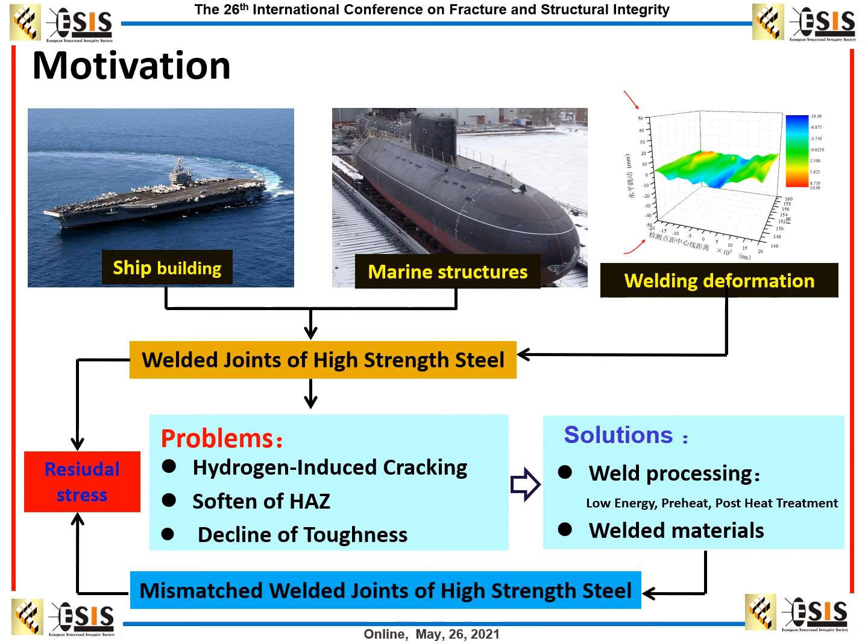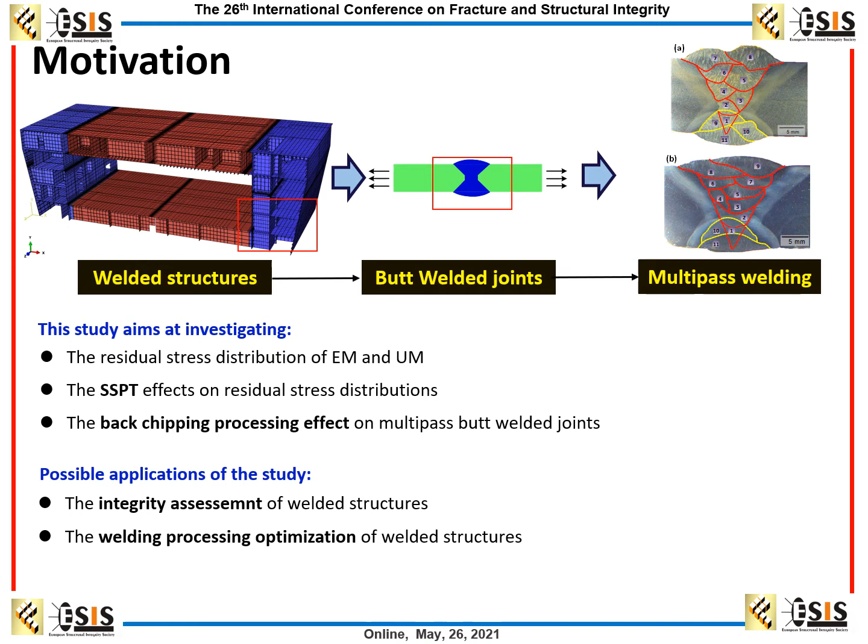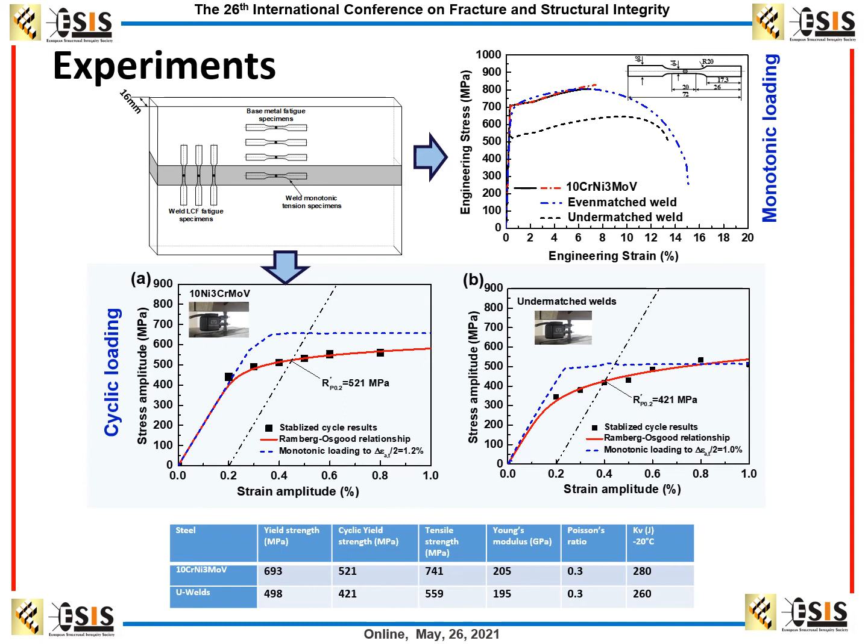This figure shows the welding pass schedule and the actual multipass welded joint with a V groove by different welding processing for even-matched and undermatched welded joints. The butt-welded joints were fabricated by the shielded metal arc welding process for the even-matched configuration using the corresponding weld, while gas metal arc welding was performed for the undermatched welded joint with the lower strength filler material.

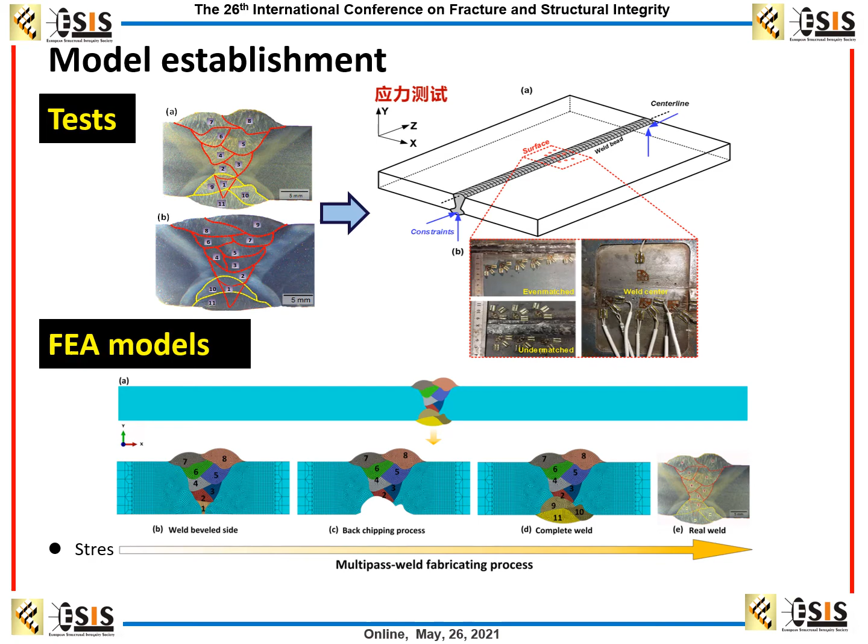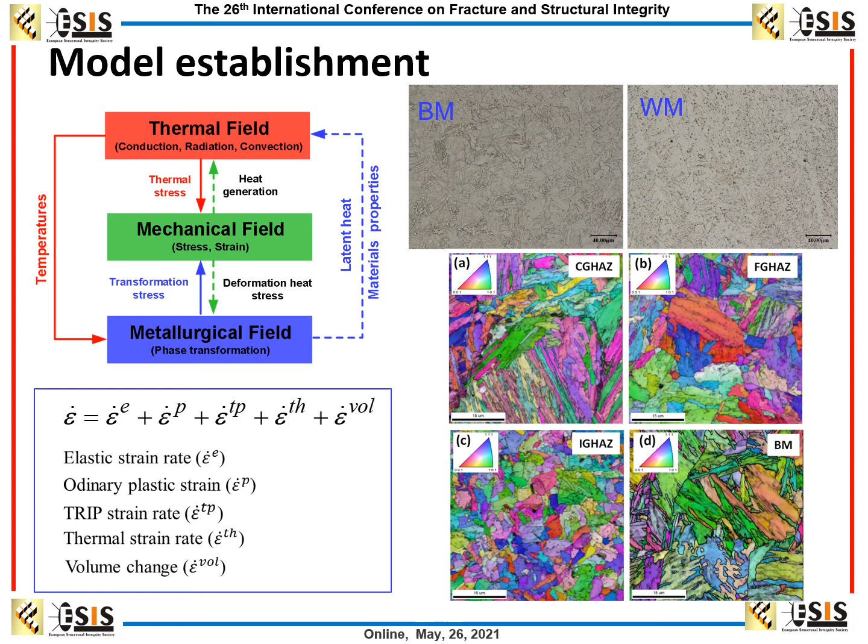The finite element method is utilized to realize the complexity of the welding process, considering the microstructure and mechanical evolution as the transient thermal field varies. These figures are the microstructure characteristic validation. We use this microstructure to demonstrate the relationship between the metallurgical and the mechanical.

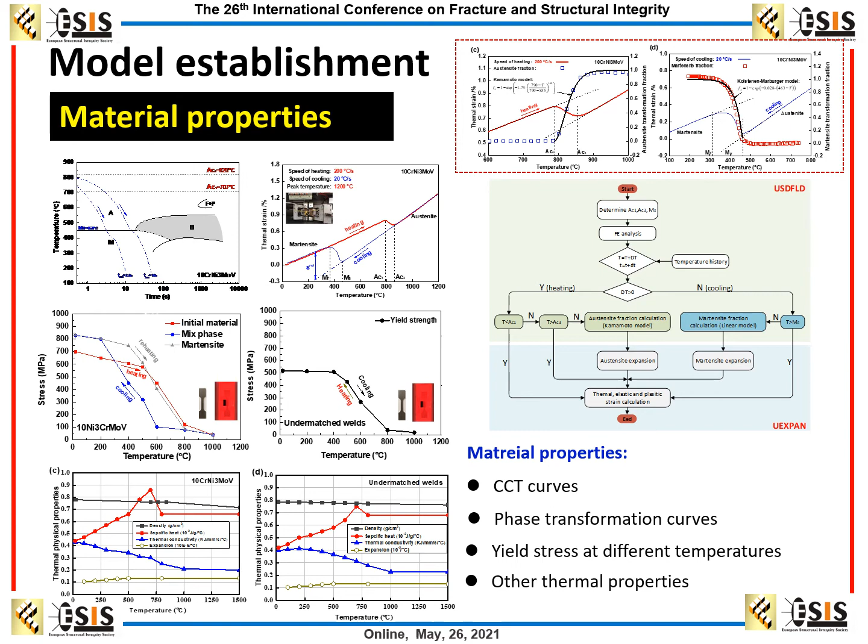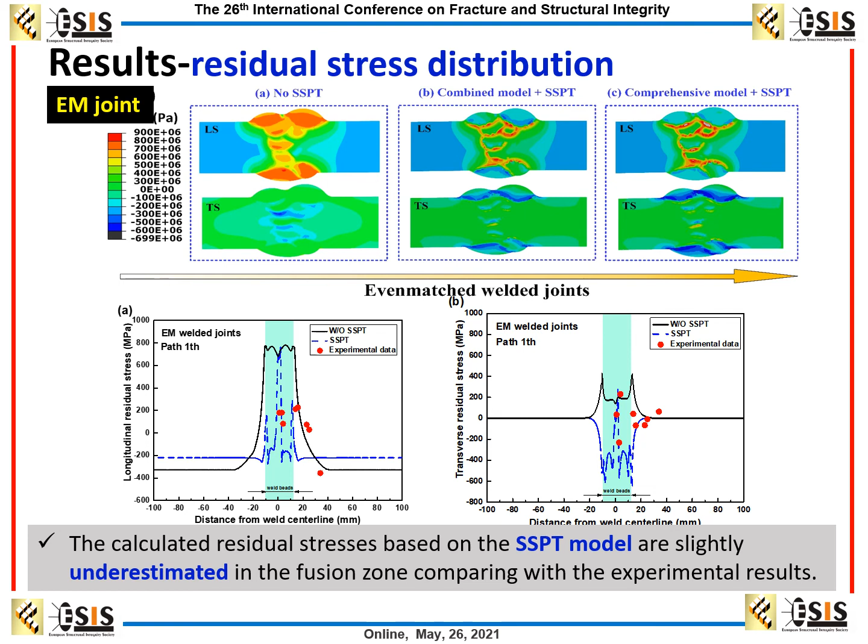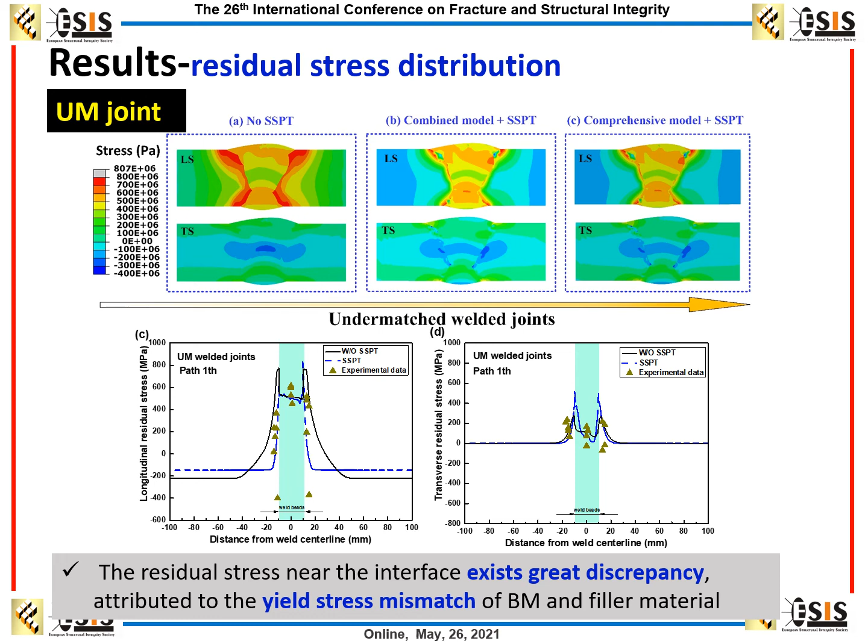This is the undermatched welded joint considering the SSPT effect or not. There's no obvious difference between these results. The residual stress near the interface shows a great discrepancy attributed to the yield stress mismatch of base and filler materials, from the figures.

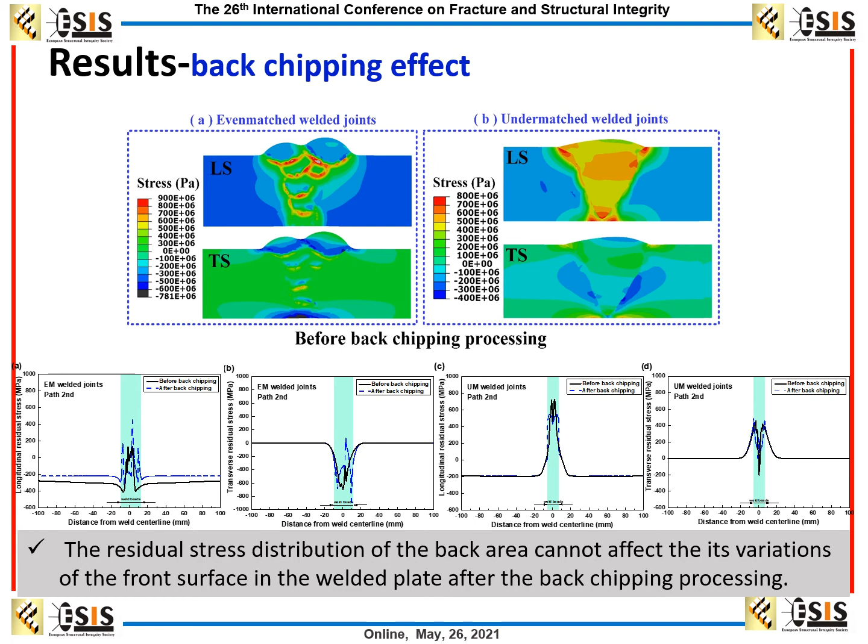The last page checks the back chipping effect on the welding residual stress. The residual stress distribution of the back area cannot affect the variations of the front surface in the welded plate after the back chipping processing. So we can summarize three conclusions.

The first one: considering SSPT and the yield stress variation in the welding process effectively enhances the computation of the residual stress. The even-matched filler material can induce great compressive residual stress in the weld zone, while the undermatched welded joint shows tensile residual stress without consideration of the SSPT effect.

The second point is that the mismatch effect of material yield strength on residual stress distribution is more significant for the longitudinal direction than the transverse direction. The residual stress distributions considering the SSPT effect exert a considerable contrast in both longitudinal and transverse directions between the EM and UM welded joints.

The third is that back chipping processing in the multipass welded joint shows a great influence on the final residual stress distribution. It can not only alter the residual stress distribution tendency, but also change the maximum magnitude in back welding regions for the EM welded joint due to the SSPT effect.